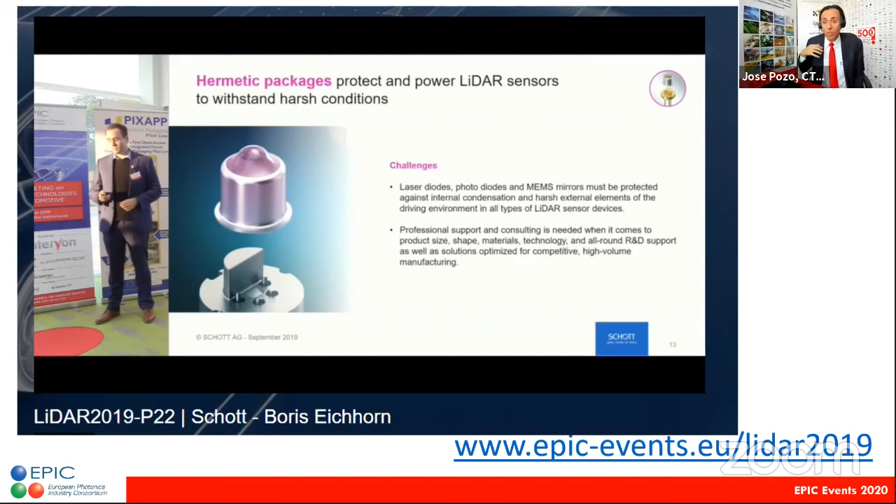Please make sure that you visit it, you check the different meetings that we organized — the one on LIDAR was Epic — and please make sure that you also have a look at the presentations, both in video and PDF, and most important, if you want to interact with any of the speakers, contact us and we'll make sure we find the proper introduction.

And also for those of you who are looking for talent, who have job openings, we are creating the biggest website for jobs in photonics. All our members have been scouted. We look at the technology that they are doing, we look at the website with the open vacancies, and we are posting it there. We are actually scouting talent worldwide. This will be the biggest thing we're going to do next year. We started already, it's great — we are really collecting so many job openings, and we really want to help the industry.

But today's focus is LIDAR, and this is the menu that we have for today. I am so happy that we have companies like Ibeo, like LeddarTech, like JENOPTIK, Smart Photonics, Hamamatsu. When marketing gives me the calendar like this, I look at it and I get excited, but then I shift it a little bit, I look at the participant list, and I make something like this.

These are the companies who, in the last 2 weeks, have given us input and have registered to attend today. Our idea is to make sure that the end users, companies like NVIDIA, like the European Space Agency, already told us the challenges that they have in terms of field of view, wavelength, eye safety, power, and the kind of quality they need for the optics, the coatings, the packaging process, the validation process, and the price. We have this information.

We need to match it with what each one of you can provide. So we have companies who are making light sources, companies like Modulight, Monocrom, and Lumibird, companies who are making the different integrated photonics for the next stage into miniaturization. So companies like LeddarTech, Smart Photonics, imec. The idea is to really make sure that we find the link for all of you to find reasons of working together.

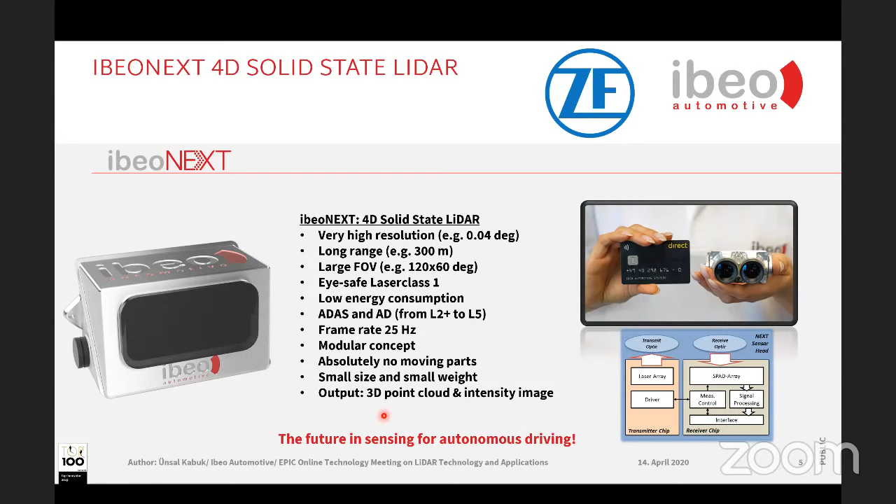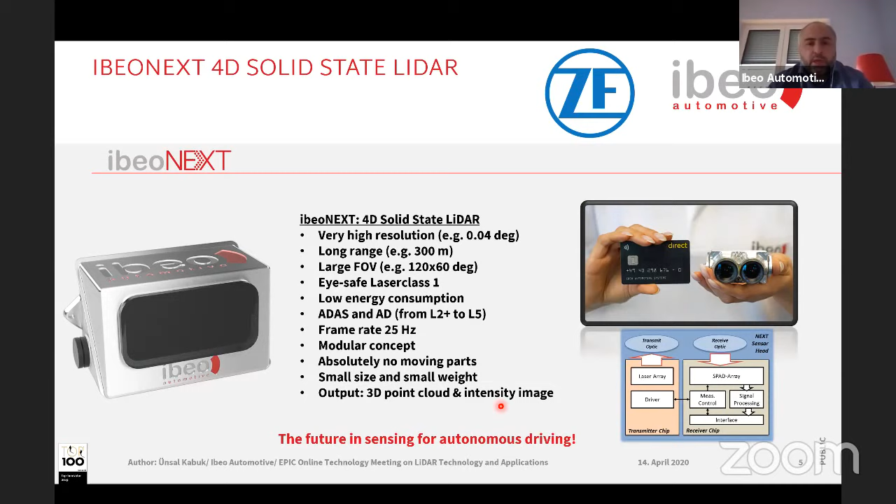Another thing we would like to emphasize is that we have a 3D point cloud and an intensity image. What this means, I would like to show on the next slide. So I brought a small video.

Let's try if it's running. This is, by the way, one video from our customer with a dual head integration. It's looking forward, and it's on a highway. The ego vehicle is driving in ACC mode on a highway. The blue boxes you see are tracked dynamic objects. In the middle, you see the 3D point cloud.

As a reference, we have a standard video camera, and on the right you see the individual intensity images, what I meant. You can imagine we have an intrinsically built-in camera fused with our LiDAR data, so we can have a lot of processing options in 3D and 2D. The amount of detail we see on the roads is much better seen on the right side in the intensity images.

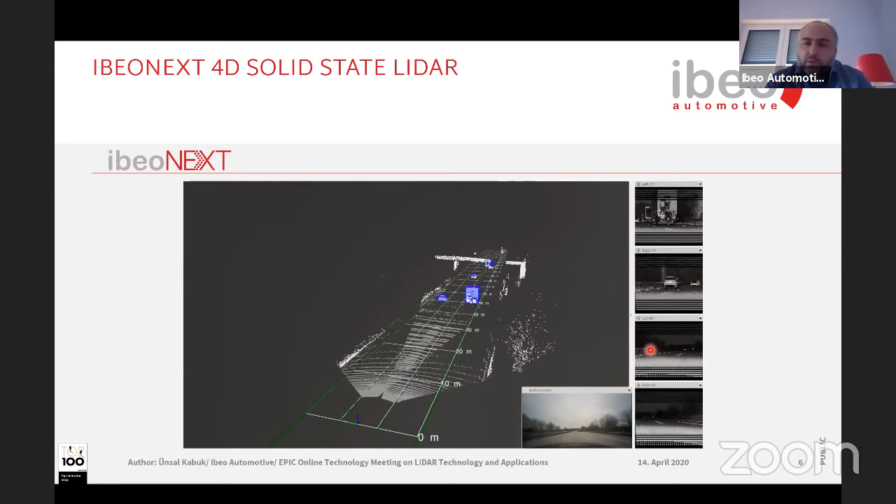We see the line markings, the truck, the individual cars, and even the opposite side of traffic coming here. So we have a wide field of view and high resolution achieved with our systems. We believe this is an enabler and a door opener for ADAS applications up to level 5, and it gives us much more robust data.

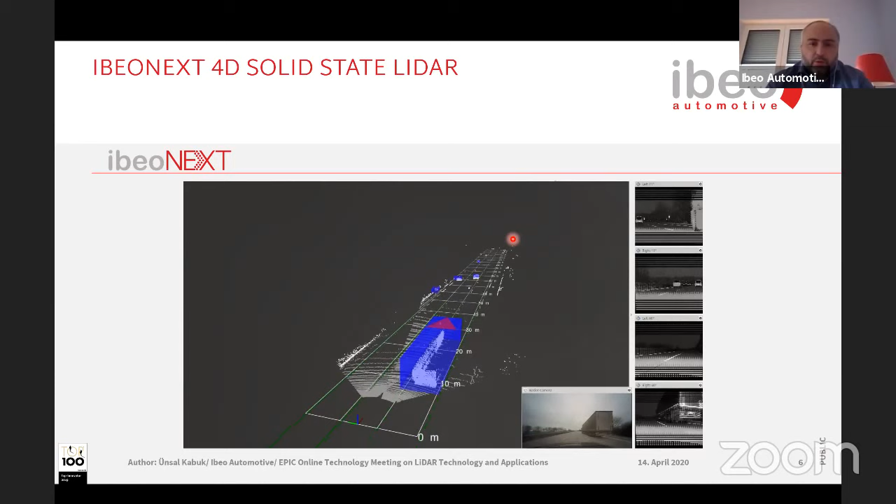It's always in a loop, so okay. So what we offer is definitely a high performance sensor. By the way, you can order it by now. This is something we've developed so far, and our start of production is very soon, in '22, for the automotive mass market.

We are targeting to be the first in the market for a true solid state system. So if you have projects and applications where you need a LiDAR, we have teams in hardware and software integration support, and we can provide all these actions to match your applications.

Another thing I'd like to emphasize, maybe it's a little early, but please book it on your calendars: the ITS World Congress in Hamburg. Since it's our headquarters, it's like playing in our home city, so we have a very good occasion to show very nice demos. We are planning very ambitious demos there, so please come and connect with us to see what plans we have.

Additionally, we always look to develop our technology further, and we are doing European funded projects, so we are open for very nice proposals to discuss and collaborate with all of you out there.

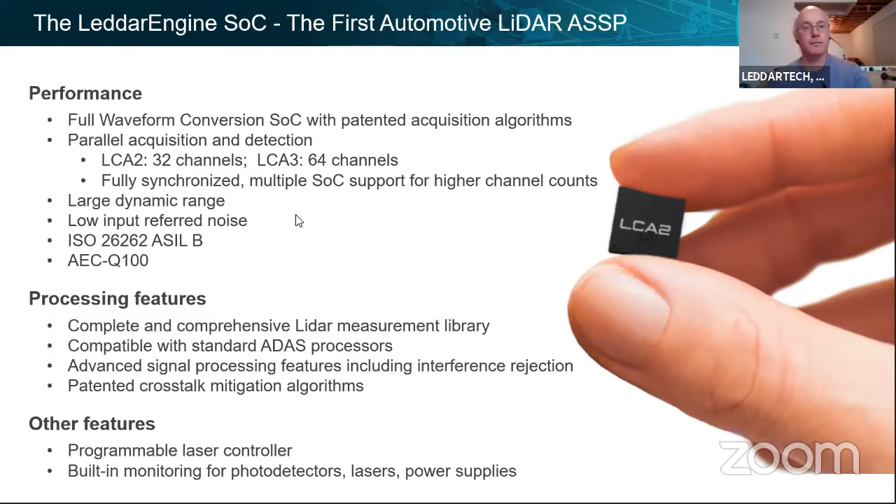We also have complete sensors available. Certainly, for example, there are AV developers that may want to jumpstart their development—they may not necessarily want to develop their own sensor hardware from the ground up.

So we have what we call the Leddar Pixell module. This is one of our latest modules that we launched. This is a true solid state sensor, and it covers a 180-degree field of view.

I say true solid state because there's lots of flexibility in what people call solid state in this industry. There are people, for example, that will claim MEMS micro mirrors are solid state. Well, this is truly no moving parts, not even micromechanical.

So it has very high immunity to shock and vibration, very high MTBF, and that's especially important for applications like autonomous delivery, where you expect vehicles to be on the road 24/7. So you need something with very high MTBF and very high reliability—you don't want the fleet to be down because of a sensor issue.

So this is shipping in volume today—we're taking orders.

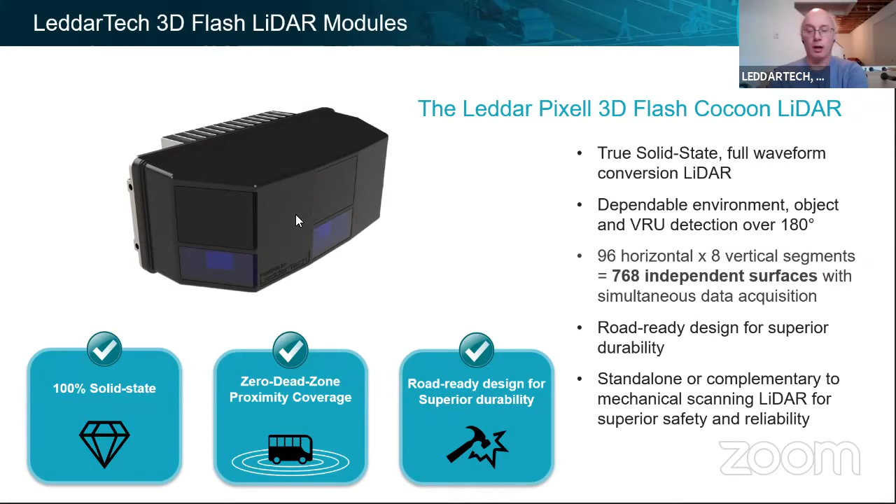Finally, I want to talk a bit about what we call the LiDAR Sense Perception Development Kit, which was one of our latest and newest initiatives. One of the challenges to AD deployment or development is that you need to build a perception stack for your sensor suite to match your operational design domains, your ODDs.

For mechanical scanners, there's lots of work that's been done mostly by the academic community today, and that can be leveraged. But for a flash LiDAR, there's very little history on building perception for these types of LiDARs. So that can be an obstacle to adopting the technology, and that's what we wanted to fill the gaps on, so that developers would have something to start from and be productive day one.

And obviously you saw our approach as far as the open platform—so we took the same spirit and approach to this initiative, making this an open platform, so people will be able to see and modify the calibration routines.

They're able to see the neural net architectures, retrain the networks, optimize them and so on, matching them to their ODDs. So truly this is meant to be an open perception stack for an open LiDAR platform.

So that's really what I wanted to cover for today. Thanks for listening, and certainly open for questions.

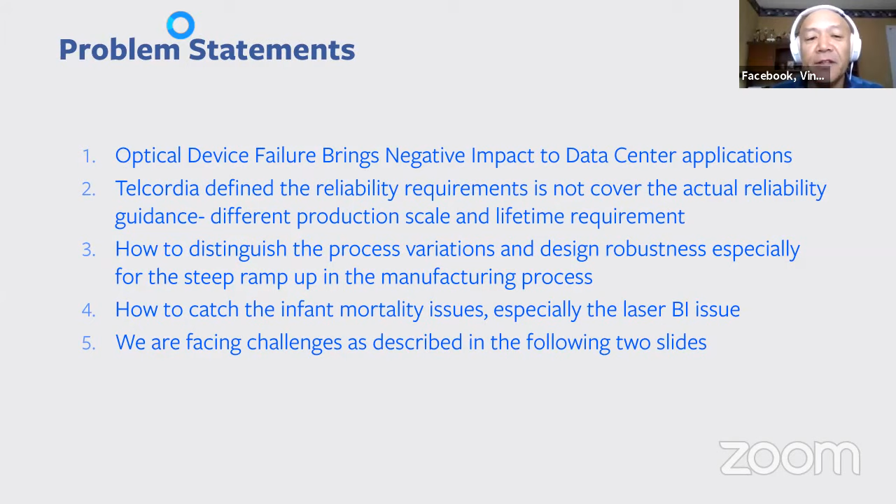This is 100 gig optics, which is what I was driving at Facebook almost 4 years ago. This 100 gig CWDM technology started probably 4 or 5 years ago, beginning to deploy. Right now Facebook is using probably millions of units every year, so it's a huge volume of product.

What we are seeing as the problem is DOA - dead on arrival. The majority of the problem is that after your device is plugged in and powered on, within 1 month you have failures. So most of the failures are happening as DOA.

If you dig into what kind of failure signatures there could be, I think among these failures, 97% of the failure is the laser. It's nothing to do with photo detectors, nothing to do with the IC, but the laser is critical.

If I dive into that path in more detail, what I found out is that currently most people are doing fabrication like indium phosphide, which is the laser used in data centers for single mode lasers. What happens is they fabricate the laser, but they fully utilize what we call the burn-in process to figure out what kind of failure could occur. And we found out that is not sufficient enough.

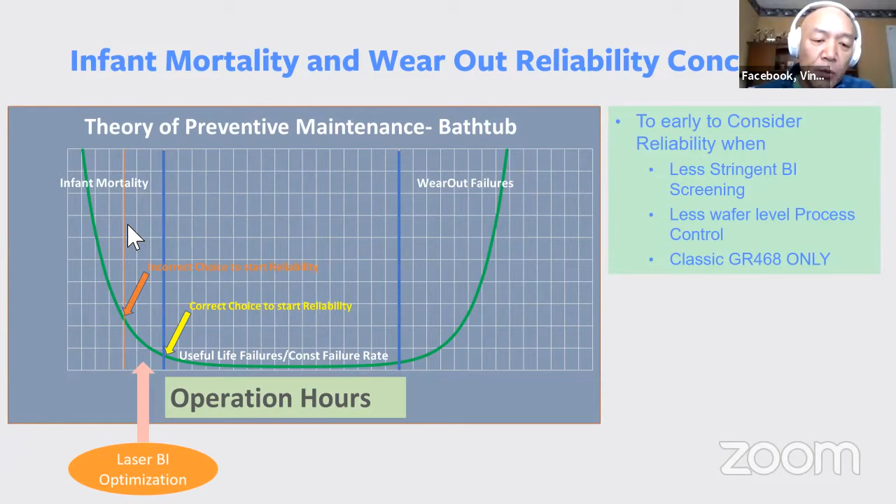But I think what we are currently facing is about the laser, especially laser burn-in optimization - it's not very well defined. That is causing the blue line to shift to the pink line, where we are seeing a lot of failures on the laser. So that is the problem we are seeing from the end user perspective, and we want to address this issue to the whole industry.

So a practical approach is that you have an overall metric, what we're talking about, the FTBM, MTBF versus the FIT numbers we're talking about for the optical devices. We also talk about the annual failure rate as well - that's one of the key metrics that controls the parameters. And obviously the Telcordia standard is one of the things we want to use and follow.

Actually, right now I'm trying to take the initiative for the photonics industry together with the data centers, to try to seek one reliability requirement for the whole industry, accepted by manufacturers as well as the data centers.

Before, optical devices used in telecom were normally designed for a lifetime of 25 years. But for data centers, we only use 5+ years, maximum probably 6 years. That's going to change the requirements in terms of reliability and quality control. Another thing - we don't want to trade off between reliability and network redundancy. As I mentioned earlier, any failures in the data center are a huge deal, it's not a trivial matter anymore.

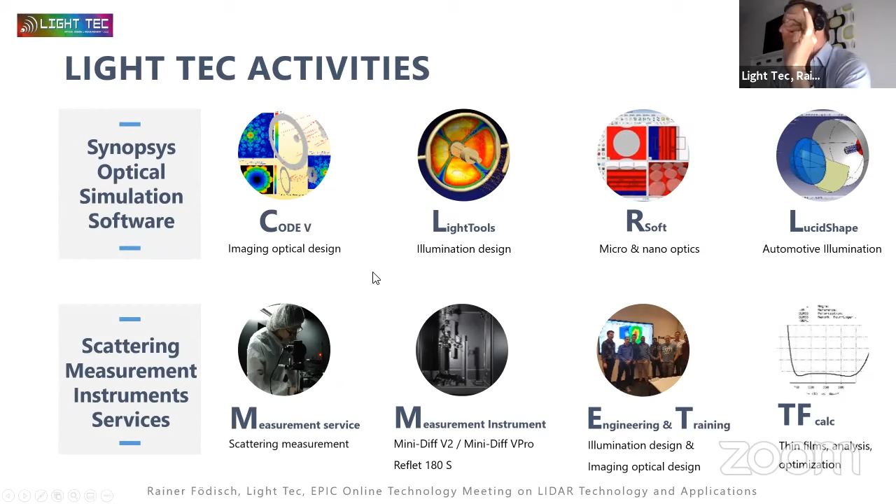What does this have to do with LiDAR? I want to talk a little bit more about CODE V and LightTools, because these are the main tools for us in the field of LiDAR developments, if we are talking about optical design, illumination design of a LiDAR system. So we have two different software tools: CODE V and LightTools.

We have seen so much increase in the LiDAR world that we have more and more requests from LiDAR manufacturers asking what our software can do for them. CODE V is excellent design software for all the imaging tasks in a LiDAR system, such as designing the laser beam optics that shape the laser beam towards the car or the environment. The scanning system is also designed in an imaging-driven software package, and of course the laser launch optics and the detector optics are important.

We are talking about LightTools as a complete measurement... I'm getting an inside call.

This is very annoying. But we use LightTools for all the interesting behavior of the light that is reflected from a car back to the detector, and for all the environmental and atmospheric behaviors that decrease your LiDAR signal. How is this modeled? For all the software packages, you have to specify which field you are using the software in. CODE V deals with imaging software, while LightTools deals more with the complete system.

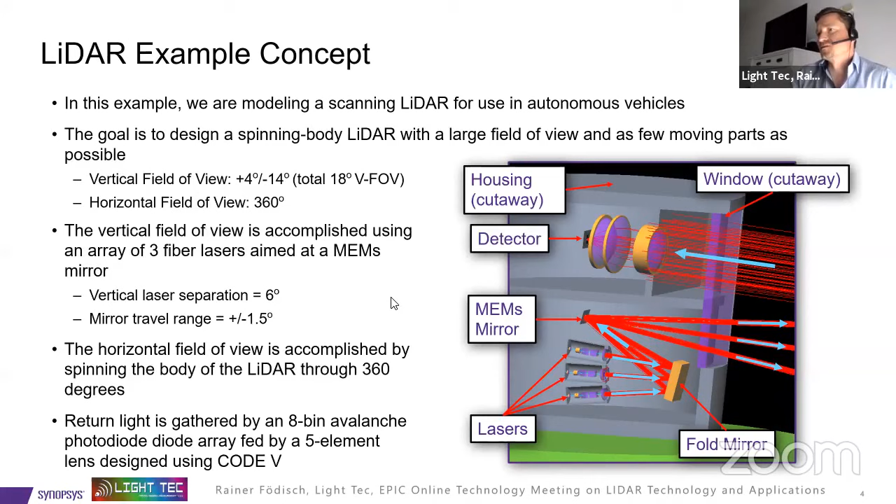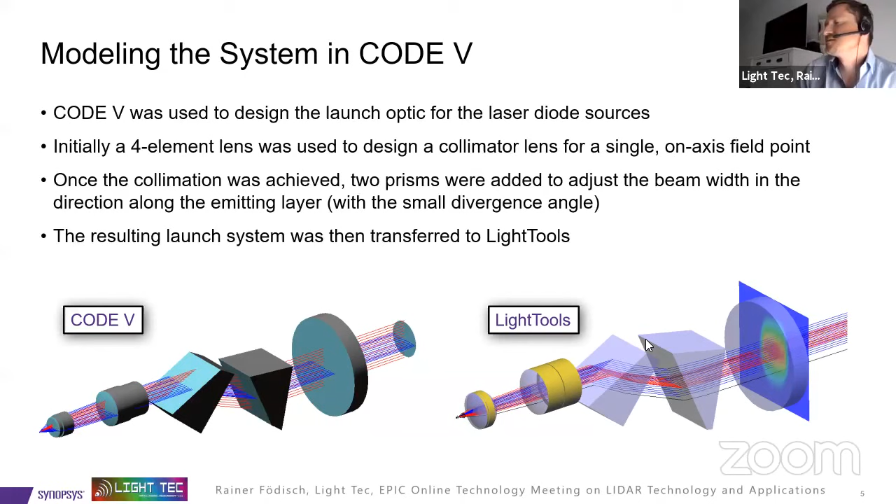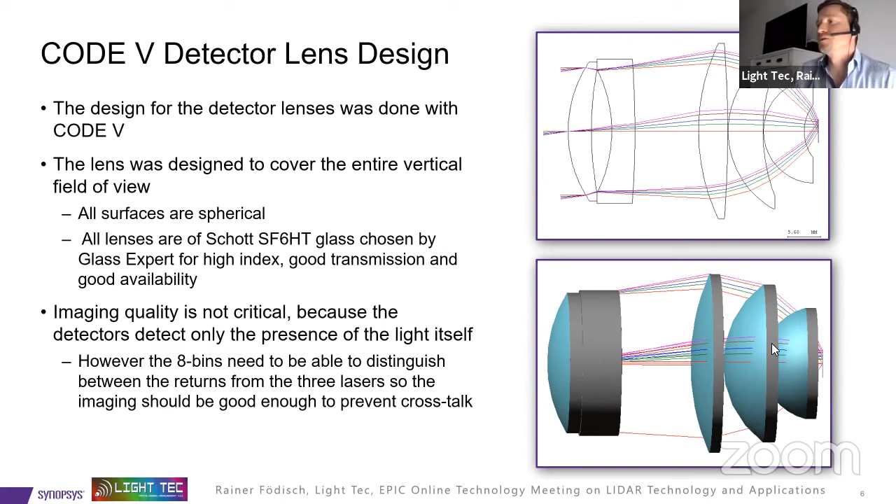The detector system looks a little different. You can only see a big lens, and on the right-hand side a small chip. For this presentation we normally used an 8-bin avalanche photodiode, which is enough to detect the light here. However, we have to catch as much light as we can, so it's a really fast system with a couple of lenses. It's not too simple, but it's not designed to have a really super sharp lens, because we just detect whether this light hits the avalanche photodiode or not. So this is important — the system is kind of fast, and it's huge compared to the sensor, because we want to catch a lot of light with the system.

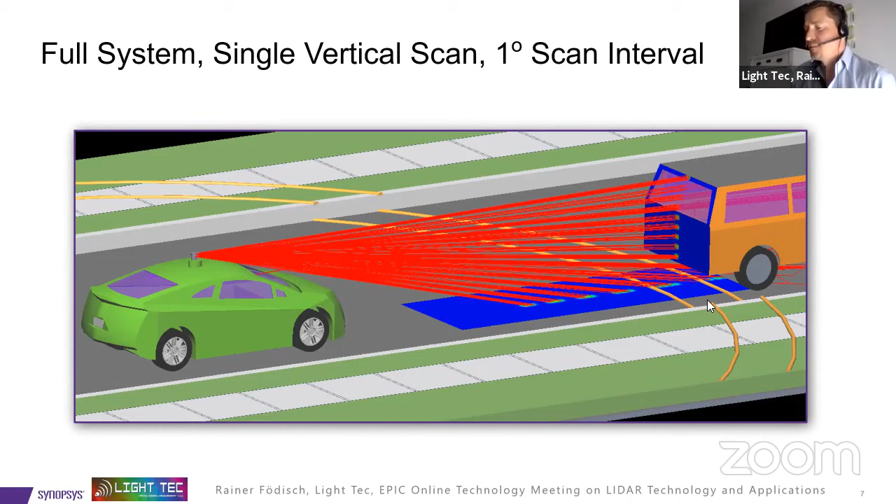In the software LightTools, you see the behavior of the system. Everything is parameterized. You see the light on the street, the reflection on the car, and the light transferred back — we measure the distance here between the rings. You see these two rings; this is just an indication of the 1 meter distance. We are measuring the time of flight by optical path length filter. So we do not want to see all the light in our system — we only want to catch the light that is important for us, and that's why we use special filters here.

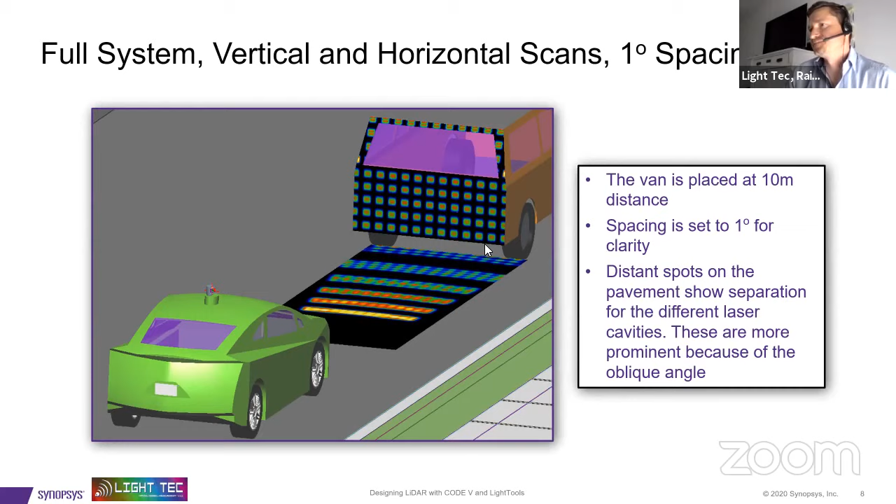So filtering of the time of flight light is important. In Light Tools, the illumination design software package, we are creating special filters - a minimal optical path length filter and a maximum optical path length filter. The detector only catches light in a specific range, here 19.2 meters minimum and 21 meters maximum, and in this range the light gets detected. We also have a source filter, and we can combine all these filters to really calculate your light on your detector.

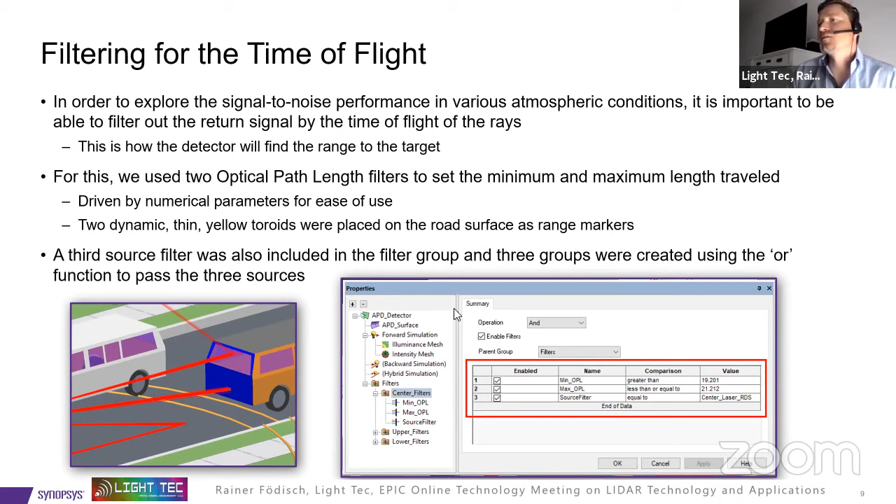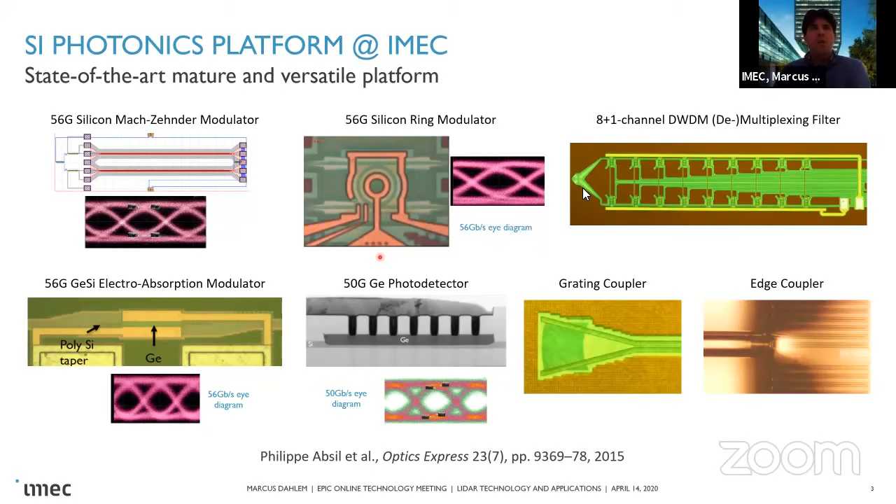The work I'll be showing you here is based on two well-developed platforms that we have established at imec. The first is a silicon photonics platform, initially developed for the telecom industry. I'm showing you some typical devices, including modulators and photodetectors, high-speed devices used in telecom silicon photonics. We are reusing this to build components for LIDAR. On top of this, we have a very mature silicon nitride photonics platform, initially developed for biophotonics, biosensing, etc. We're talking about wavelengths that could go all the way down to the visible. So with these two platforms, we can cover anything from visible all the way up to O and C band.

Showing you here just the basic general building blocks of a LiDAR. This is a very simplified version or a way to look at it. But there's a set of components that fit in a photonic integrated circuit, and there's a lot of control and processing that would fit into an ASIC. Ideally, at some point, you will be able to build all these components into the same photonic integrated circuit.

We are working on several of these components that you can see here. But today, my focus is on this optical phased array, which is a solid state solution to delivering the beam and to receiving the beam as well through two different ones, or even through the same one if you use a circulator in this approach.

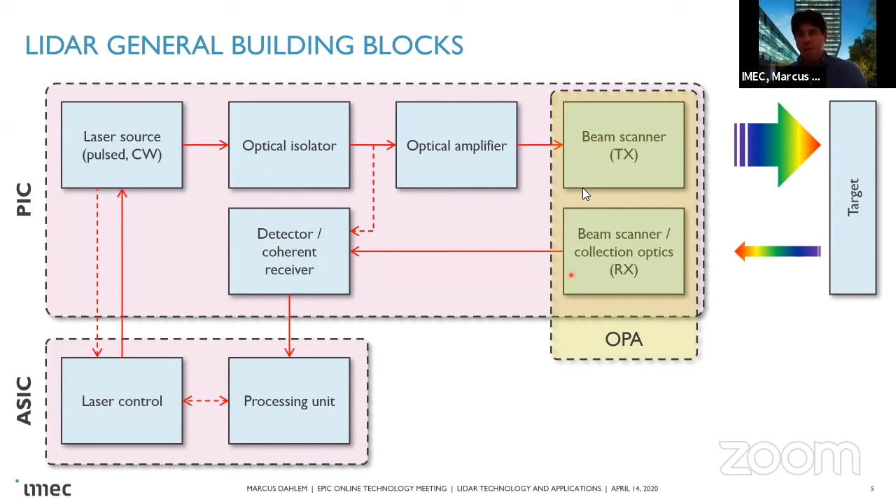There's a lot of general target specs that the industry may want for automotive. I'm not going to go over all of these, some people have talked about different specs. I just wanted to point out that when it comes to field of view, our understanding is that in the horizontal, anything from 30 to 100, depending on the application. In the vertical, 10 to 30, shown here as horizontal and vertical field of view.

The way we scan through this field of view is with an optical phased array. This particular demonstration happens at 1550 nanometers. Having said this, we are agnostic to the wavelength you decide to use, as well as the detection engine you decide to use. Most people traditionally have been using time of flight engines, but FMCW is also a very interesting technique, which would work very well at wavelengths in the O and C band, so 1310 and 1550.

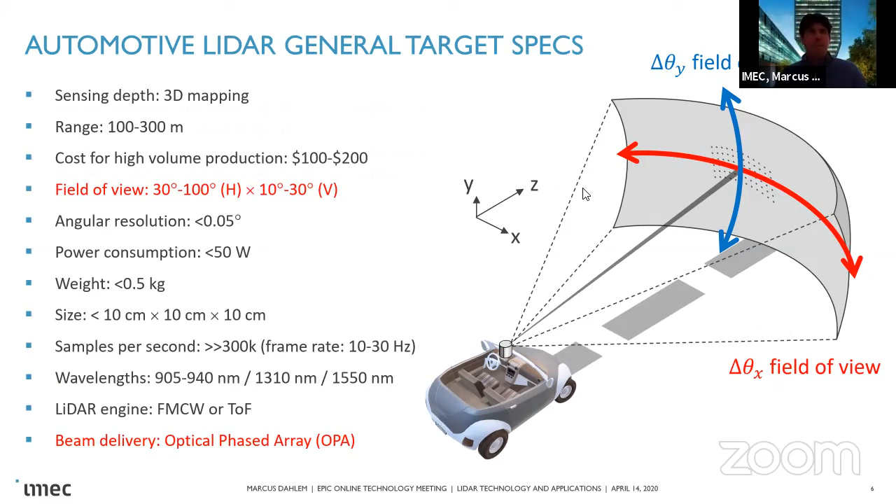A phased array has been around for decades in the RF domain, and many people are familiar with what they are. It's essentially an array of emitting elements spaced by a distance d, where each antenna is fed with a differential phase shift delta phi. Assuming the amplitude is the same, though it can also be changed, if you look in the far field as a function of this angle, what you see is an interference pattern that shows normally a main lobe, some grating lobes, some side lobes.

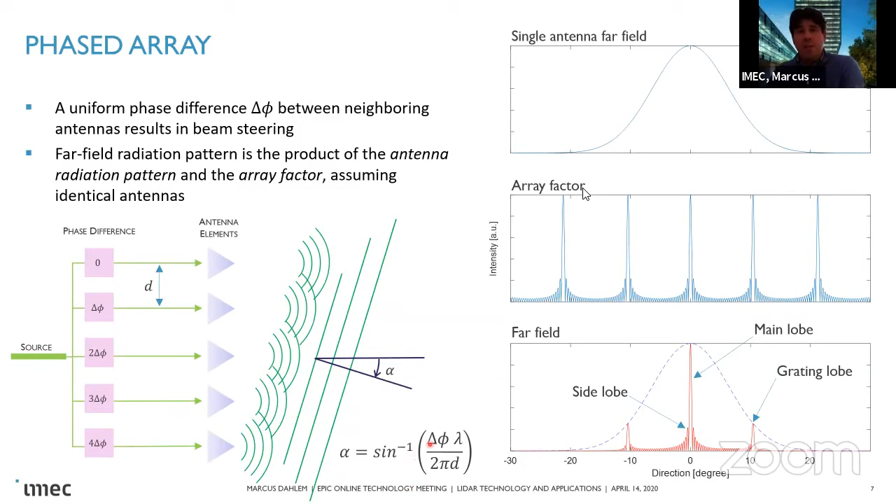This is simply the multiplication of what we call the array factor, which depends on the distance and location of the antennas, by the element factor, which depends on the design of each individual antenna. As you feed and change this differential phase shift, you're steering your beam in this direction, shown in this illustration. Simply by changing the phase, you are steering your beam in one direction, this alpha direction.

We use that idea to steer the beam, and I'm showing you here a photonic chip to steer the beam in this horizontal direction. This horizontal direction is achieved by tuning the phase shift between each one of the antennas, and we do so through thermal phase shifters using the thermal optic coefficient. The second direction, the vertical direction, is achieved through tuning the wavelength of our laser source. The reason is because each one of these small antennas is based on a grating, and that grating will have an angle of emission which depends, among others, on the wavelength.

And what I'm demonstrating here, and these are some of the very recent results that we have, is a photonic integrated circuit built on silicon and silicon nitride. So it's a hybrid platform.

This particular demo has 32 of these elements with a small pitch of 2.5 microns and antenna length of 500. Obviously, the combination of these number of elements, pitch and length determine your spot size and your field of view. For this particular demonstration, we have a field of view in the horizontal of 38 degrees, 15 degrees in the vertical. The spot size can be reduced if you increase this number of elements.

Having said this, this field of view, which is limited by the antenna pitch, can be increased if you tile several of your photonic chips. So you can reach any combination by tiling these in horizontal or vertical direction.

So let me go straight into these results. If we look at this sort of far field here, which I'm representing, this is just the image from our imaging system. The dotted lines here are the field of view of our microscope. What we do is we set first the steering range. In this particular case, it's 38 degrees, which is determined by the spacing, the pitch between the different elements.

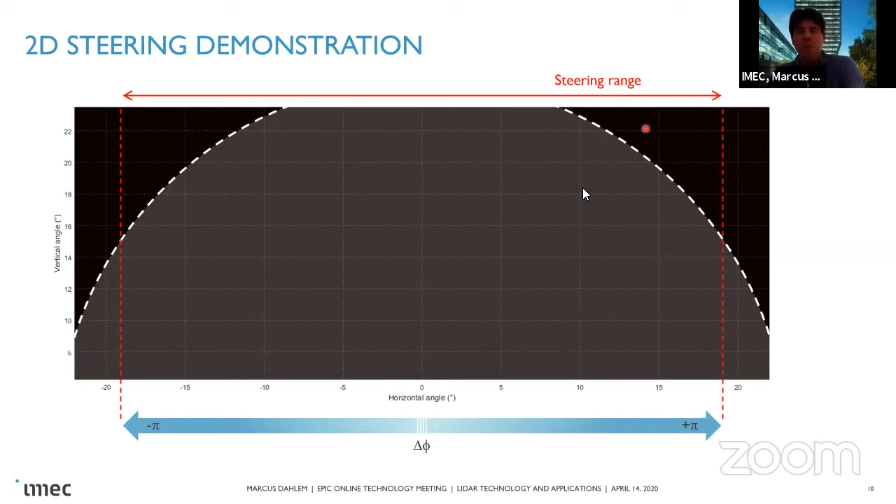As we tune the phase, the differential phase between the different elements between minus pi and pi, or 0 to 2 pi, we can steer the beam in the horizontal direction. In the vertical direction, we can do something similar by, in this particular case, switching or tuning between 1500 and 1600 nanometers. We can then decide, okay, let's address the following points in our 2D space, and then we can pretty much scan any of these points that we define by tuning the phase and the wavelength.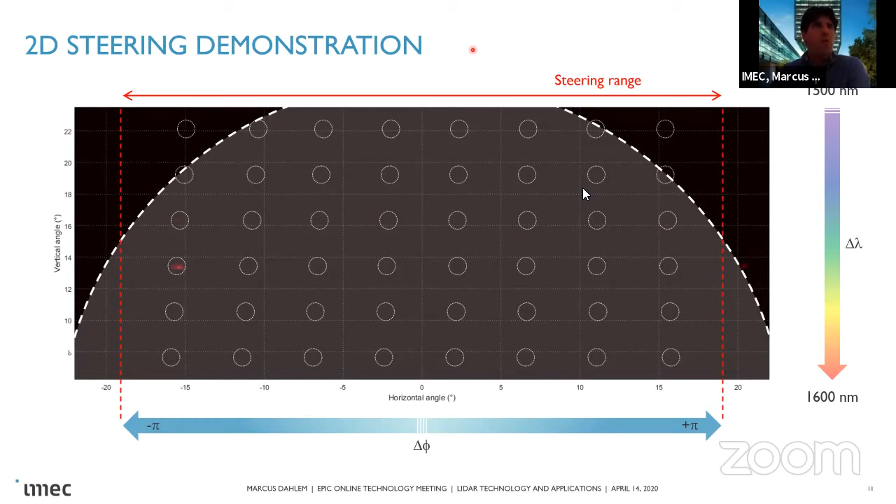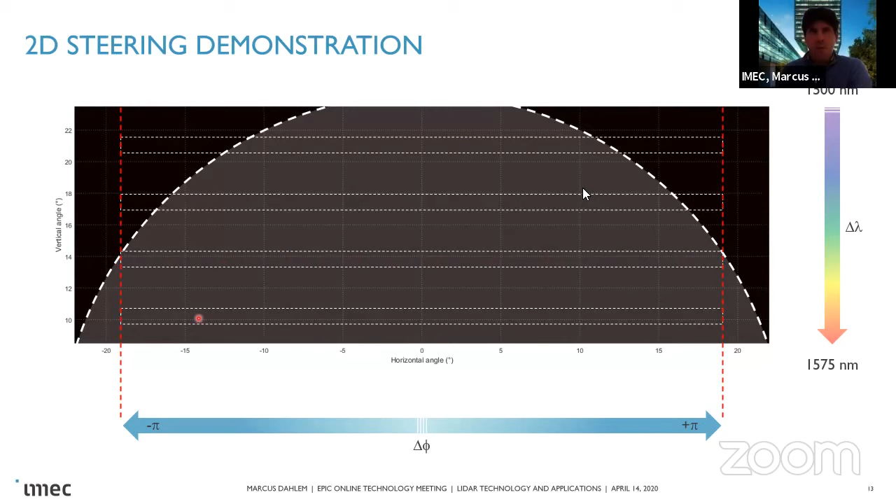And this is an animation that I hope you can see here. Obviously, you can go to a different set of patterns. In this particular case, I'm just scanning through these lines back and forth, jumping to the next line, etc. But you are not limited to this, and you can scan any pattern that you wish. I'm also showing you here a scan in a zigzag pattern and in two circles.

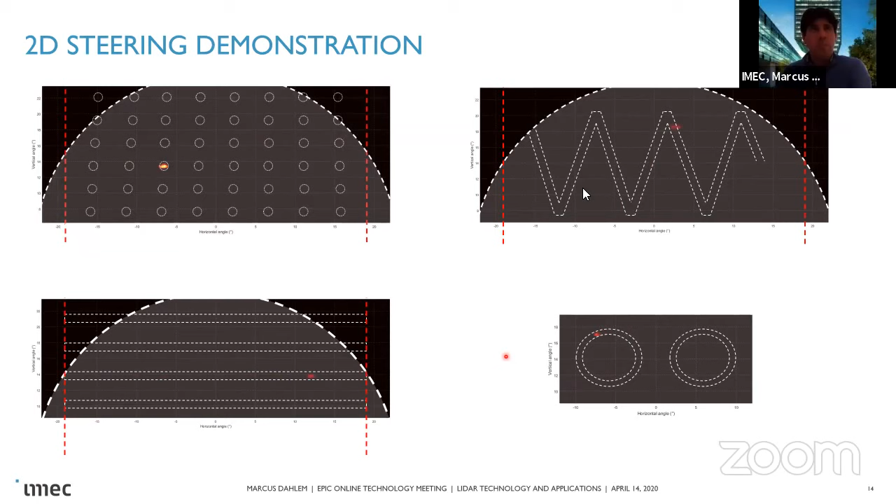So just to quickly summarize, we are working, among others, on 2D beam steering devices, in this particular case in a hybrid silicon and silicon nitride platform, where the tuning or steering is achieved through thermal phase shifting in one direction and wavelength tuning in the second direction.

Obviously, something I didn't mention in this talk, but phase calibration is essential because you have these tiny waveguides, you will have phase errors. So detecting these phase errors on chip, which we do with on-chip phase calibration schemes, including integrated photodetectors, we can in real time monitor and correct for these phase errors.

And as we talk, we are demonstrating similar steering capabilities with more elements, and that's something we're working on right now. Another interesting thing is we're also working on 2D lenses using switch matrices and so on. So just wanted to let you know that these optical phase arrays are not the only sort of solid state steering mechanism that we are focusing on.

There's still a lot of challenges when it comes to designing these OPAs. Some of them are power consumption, insertion loss, complexity that it becomes when we increase the number of antennas, the tight laser specs, especially if you want to do FMCW, really narrow linewidth lasers, and of course the integration of all this into the same platform.

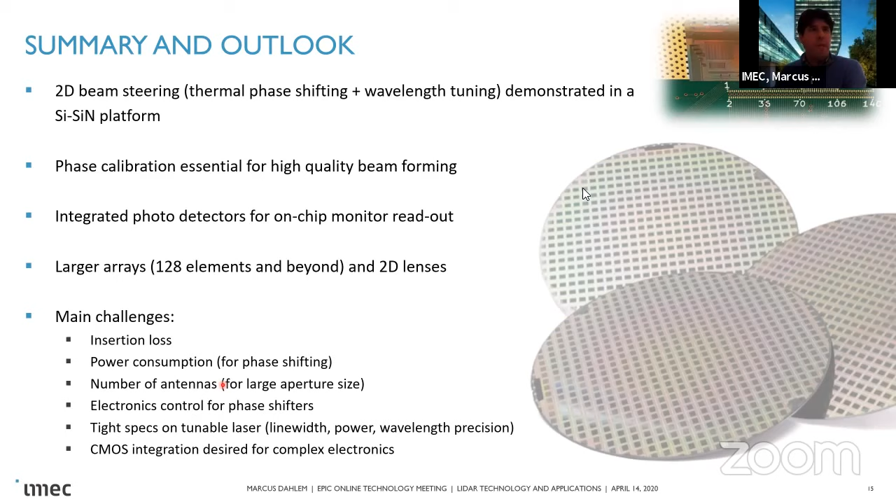And these main challenges are driving our research activities in this field, in particular looking at hybrid platforms, not only with silicon and silicon nitride, but potentially with additional materials, looking at how to integrate these III-V lasers onto silicon and silicon nitride, looking for packaging solutions, low power phase shifters, and put on-chip photodetectors for either FMCW, LIDAR engine, or for calibration schemes.

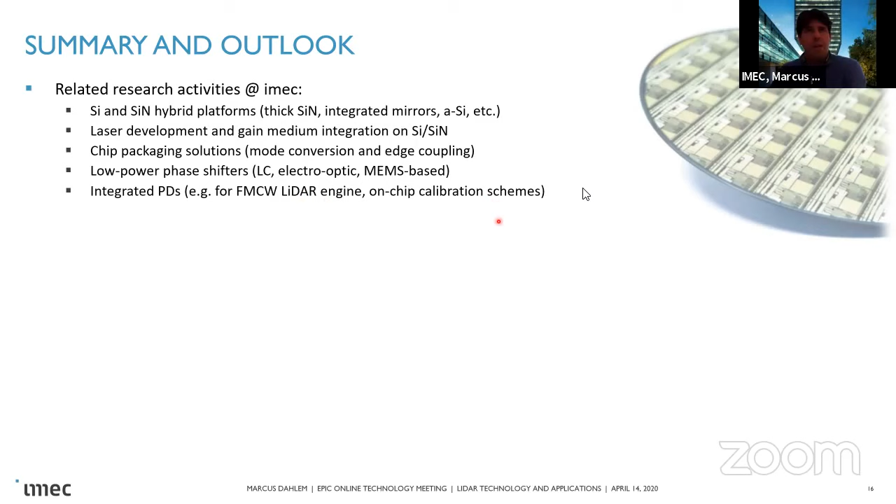And the way we operate is that we engage with our clients, with our partners at any level or at any stage, from the simple idea to performing a feasibility study, to see what's doable and what's not, all the way to low volume manufacturing that happens in our clean room that operates 24/7.

If the company requires high volume manufacturing, we're happy to transfer that process to a foundry, allowing you guys to have volume production of your devices. What we are looking for in participating in these meetings is people that could help with some of these topics, and also to learn what you guys are interested in, because we are here not to compete with any of these LiDAR companies. We're here to provide components and solutions for any of you guys. Thank you.

Thank you so much, Marcus, for this nice talk. As a person who can't drive, I'm totally relying on the outcome of this meeting too, about the autonomous automotive industry. I think your technique now will overcome the constraint power and size budget for that. I would like to hear the opinion of our friend Benedetto from Huawei about this meeting and this talk in particular.

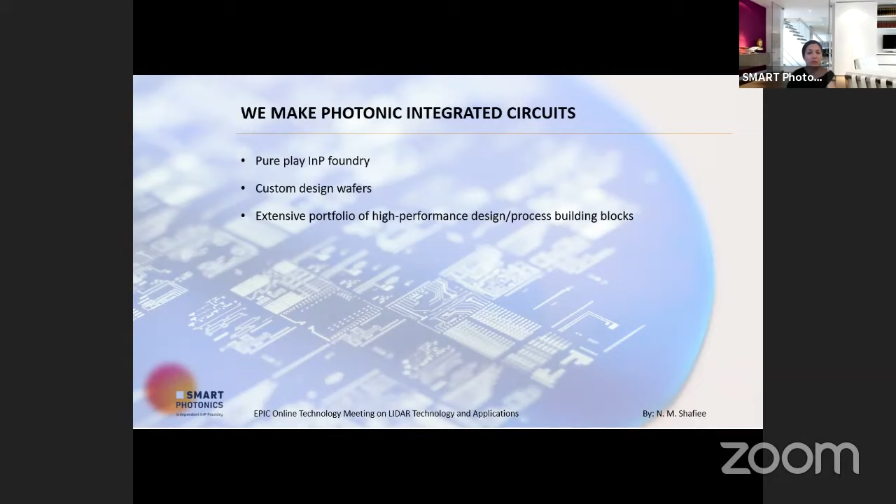Again, as mentioned earlier, that's not the only thing we do when it comes to manufacturing a product. We make sure it's manufacturable. We take our customers along the technology readiness and manufacturing readiness maturity. We get involved at an early stage, at the exploratory part.

It could be on a multi-project wafer platform, where you can test the design on a wafer with a number of other customers, or you can ask for a specific dedicated run for a dedicated wafer because of the specific set of requirements that you have. But it definitely doesn't end with simply a prototype. We have a process of guiding prototype manufacturing to volume manufacturing of developed products.

So I'm going to keep this portion a lot less specific and more looking for feedback. Surely you all know the amount of investment that went into LIDAR in 2019 alone, spent across technologies and systems. So my question for you is, what are your specific requirements? Again, we've heard specific needs, whether it's 940 or higher up or lower down, but what are you looking for?

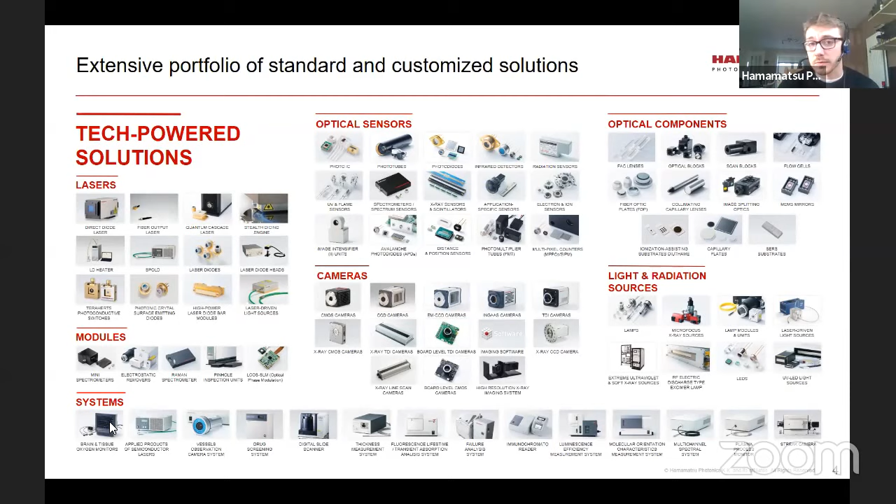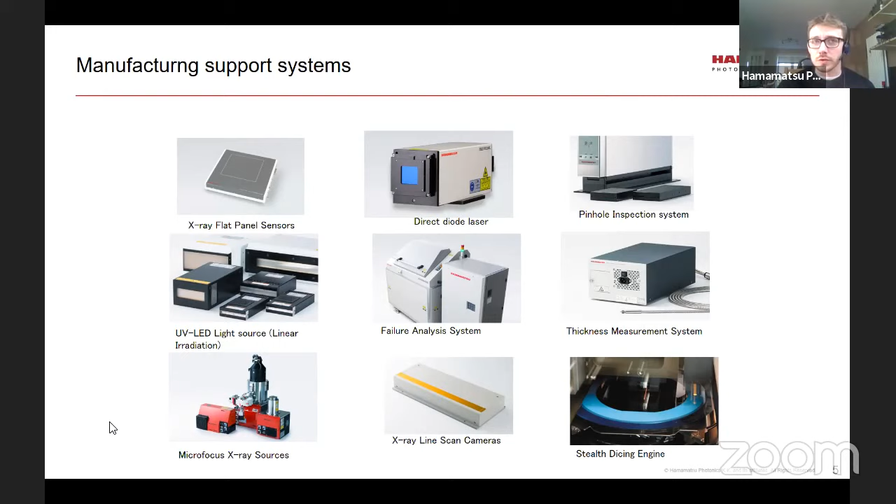And that was just to touch on what systems we write into this. So we have the failure analysis system, talking about the yield of wafers earlier on. We also provide stealth dicing engines for semiconductor wafer processing. I won't go through all these, but just to give an idea that we don't just sell components, we can supply into other parts of your production as well.

So what I briefly touched on earlier is that we have different detector options - we go from PIN photodiodes, APDs, and SiPMs. And also what we're developing is offering detector options at both 905 and 1550.

We've been building upon our SiPM development from the silicon 905 wavelength, and what we're also doing is trying to develop an InGaAs multi-pixel photon counter. That is in the roadmap of our development.

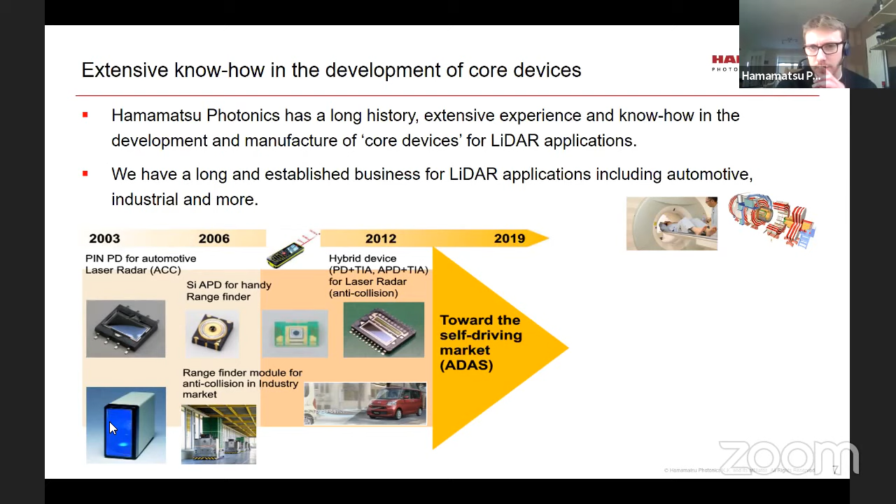Another thing we've been doing, which you can see in this picture in the middle with the green background, highlights that we're working on downsizing the footprint of the chip, the sensor. You can see in the pictures where we're supplying sensors with the circuit, the ASIC, implanted on the same chip package. I've got some pictures of those later on, but this massively downsizes the footprint of the sensor, the associated circuitry, the power consumption, and the heat coming off the device.

Just to throw out another acronym, MPPC is Hamamatsu's trademark name for silicon PMs - completely the same technology, just to confuse you so we can diversify ourselves to market. One reason is we're also working on these InGaAs photomultipliers, and you couldn't use the trade name SiPM for an InGaAs photomultiplier. So that's why we use the MPPC name, but it's the same technology as a SiPM - it works on the same principle, same method.

So what I briefly mentioned is this 1D picture - that's a silicon PM photomultiplier with a 1x16 detector array, and built on the same chip is the processing circuit, which is aimed at prioritizing the timing of the detector.

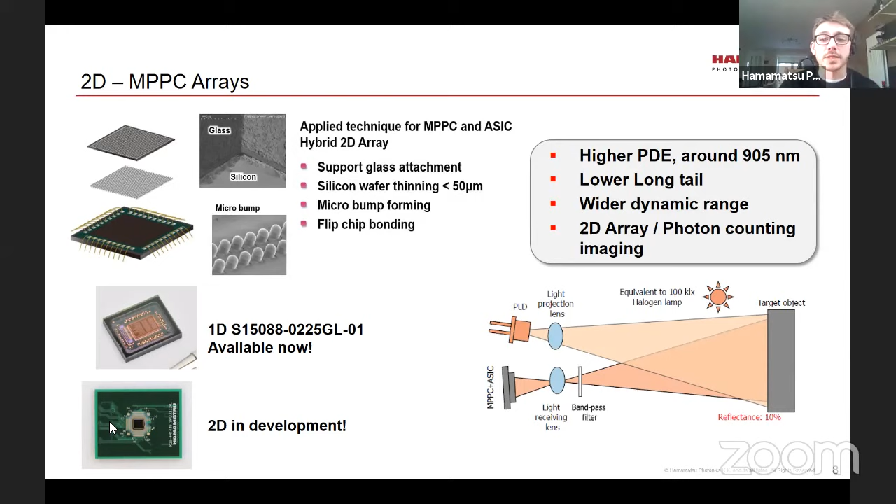That is the one dimensional array, and what we're working on now is a 2-dimensional photon counting image sensor. The difference is that for an MPPC array you get one output, basically summarizing all the light incident on each pixel. With the 2D image sensor, you get individual outputs, which is a bigger benefit - there's a lot more detail you're going to get from an image in that sense.

Briefly going through this due to time, but as I touched on, we do the detector side and we're also offering the source side. This is our newest product aimed at 905 - it's a ceramic package VCSEL, PLD, and we do have VCSELs in development.

This PLD is up to 105 degrees temperature robustness, and we manufacture all our components with AEC-Q qualification in mind. With the amount of products we make, we don't certify each product as they're made, but we manufacture them in a process that would pass these tests.

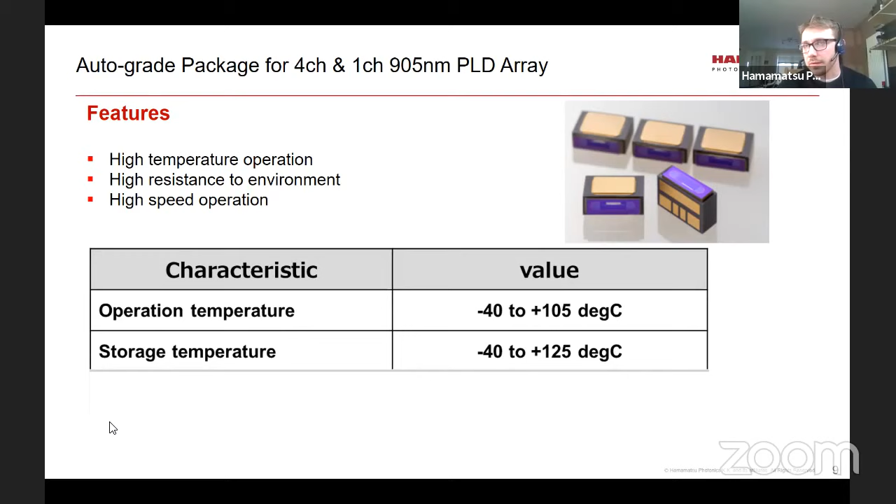So if you look at a particular component and it doesn't specifically say it's AEC-Q qualified, the solid state division basically works on a process where all their automotive components will be developed in a way that passes this qualification. It's just the amount of time and money it costs to qualify them - they won't do it for every single component they bring out.

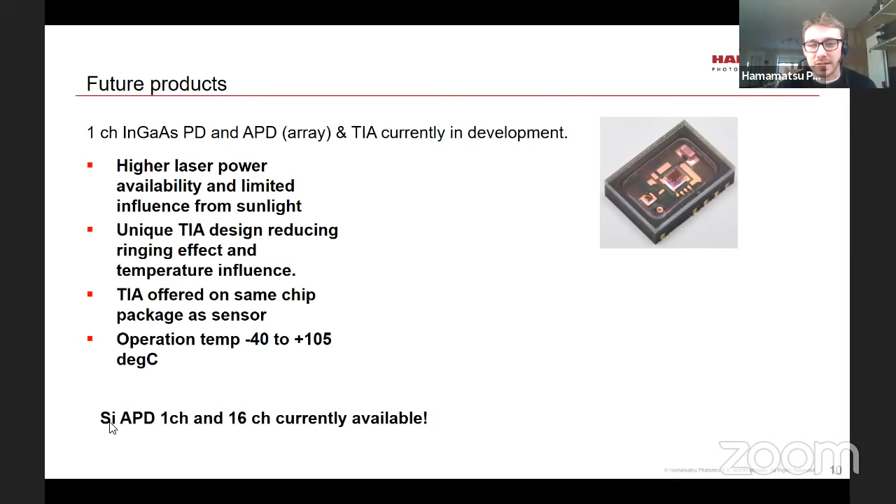Again, sort of touched on the other side, so looking at silicon, then at 1550, some of the just getting ready to release are these InGaAs photodiode array and APD arrays, which uniquely are our sort of secret sauce, where we'll call it how they designed the TIA. I can't tell you that because I've given away the secret, but that reduces this ringing effect, noise effect in the device, and also the robustness to temperature.

So just to summarize what I've put out there, Hamamatsu uniquely have this being the unique position of manufacturing all parts of this LiDAR system in-house, covering detectors, source, and offering complementary circuits as well. We have the reliability in terms of the qualifications already in place, and we also have the capacity in terms of the manufacturing side.

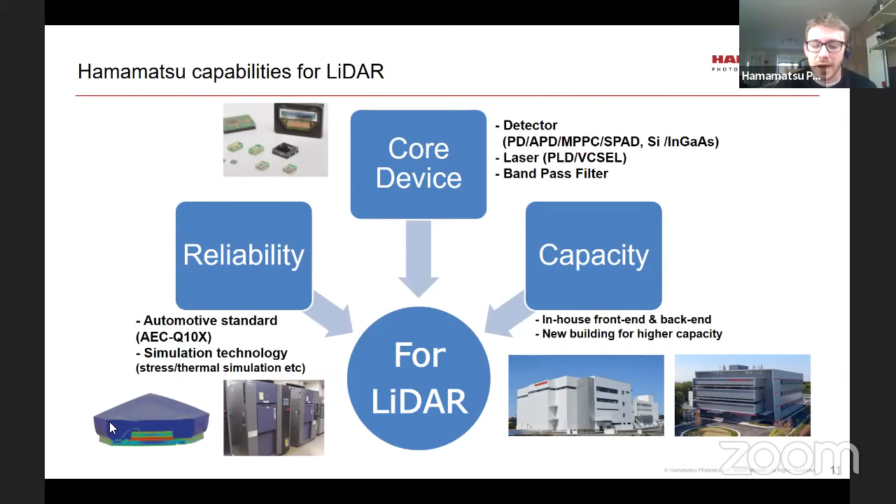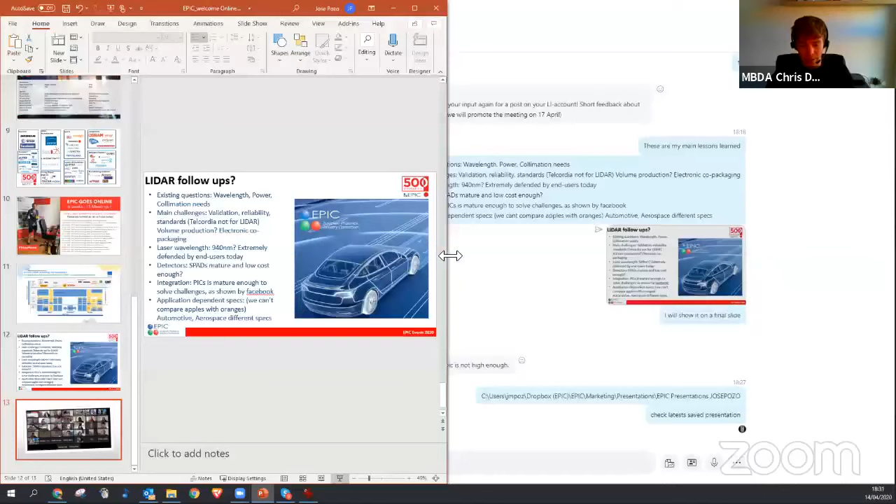So the big takeaway for me has been, something we've been interested in integrated photonics for quite a while, and going forward, that's probably the right direction for us to head. A big takeaway for me has been some of the integrated photonics companies, and the amount of flexibility there seems to be in terms of just going along and doing the research before you get to this stage of mass manufacture. Our business is not one that we are manufacturing 100,000 units. We're manufacturing a few hundred at maximum. So we really need to take advantage where there is the opportunity to go along and do this low volume testing and doing the R&D in these kind of silicon foundries or indium phosphide foundries, and take advantage of that.

Benedetto, from the point of view of Huawei, what has been the key learning points today, and what kind of cooperation do you think you can take over after this?

Well, basically, I've seen a lot of interesting presentations ranging from the photodetector side. So what are the available technologies that are enabling the detection of these LiDAR systems? And also what are the enabling technologies, not only related to integrated photonic circuits, but also for scanning systems or other methodologies for LiDAR ranging. Also, another important thing are the simulation tools that can be used for simulating environment conditions. So this is also, I think, a very important aspect of the design point of view, but also for the co-packaging of the system. So understanding what are the performance needed for the sources, for the detectors, knowing what are the limits introduced by the environment. So this is very interesting indeed.